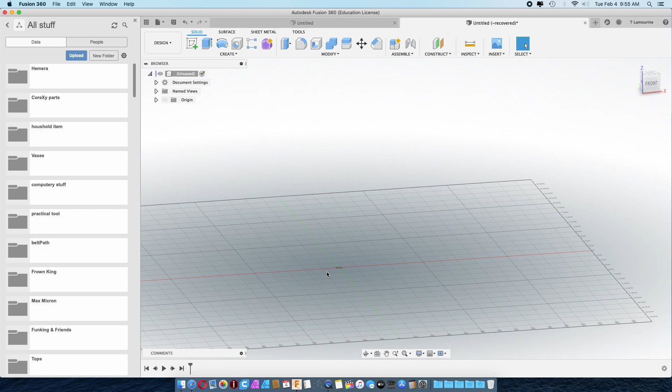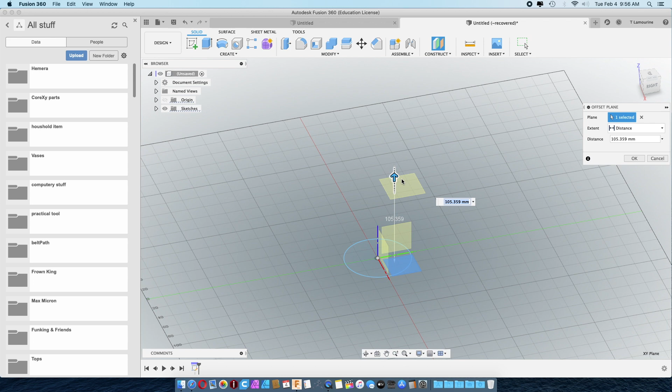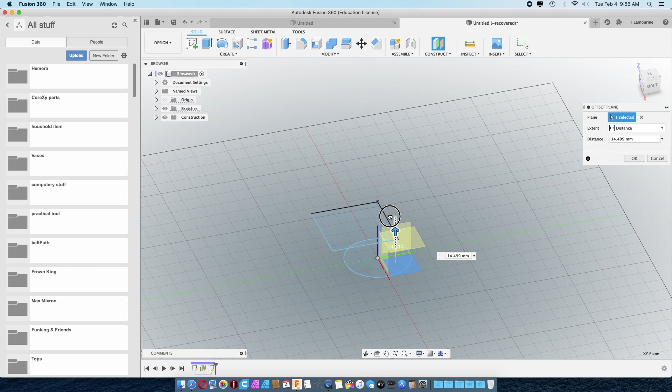So the first thing you need to do is give yourself something to loft. You basically draw some whatever shapes. Draw a circle. You have to have planes and sketches. I'm gonna bring one off here, just go up 75. Draw another whatever sketch, let's do a square. We can even do it over here, doesn't matter. And a sketch. I've discovered that you really should go from the bottom plane or the start plane that you're going to work off of, so you know the actual final height. Let's do 150 so it's even sized.

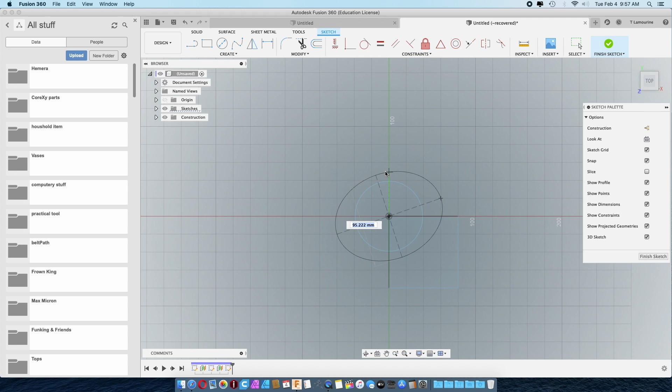And let's create a sketch. And let's create an ellipse. How's that? We'll make it all weird, even. And finish sketch. Now you can just loft it right now.

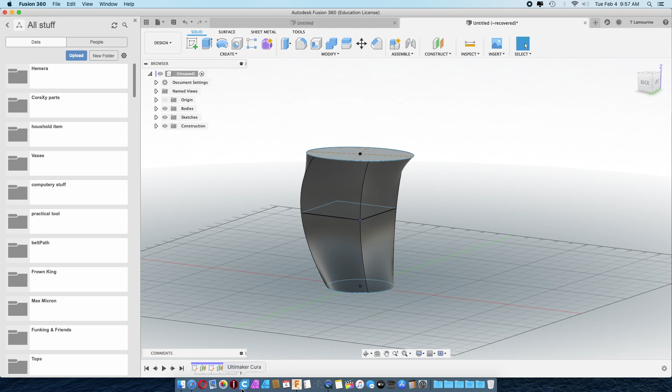Loft. And it will go from one to the other and give you a bizarre shape. And it's very cool. Now the other thing, I got this wide open, is I gotta actually edit feature. If you look at these little dots, you can move these dots around and it will actually edit your shape and the arcs.

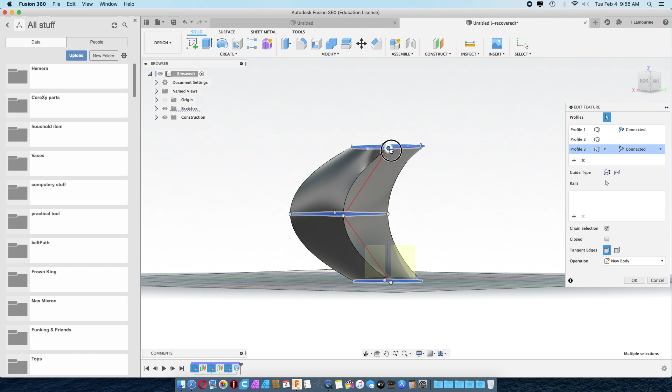These are basically exterior guidelines and it changes the shape. See how it's changing it? Well, you can do it on the square too. I don't recommend it, I'll give it a shot, but sometimes it crashes Fusion out on me. And it doesn't do as much. See how it's just changing the pitch.

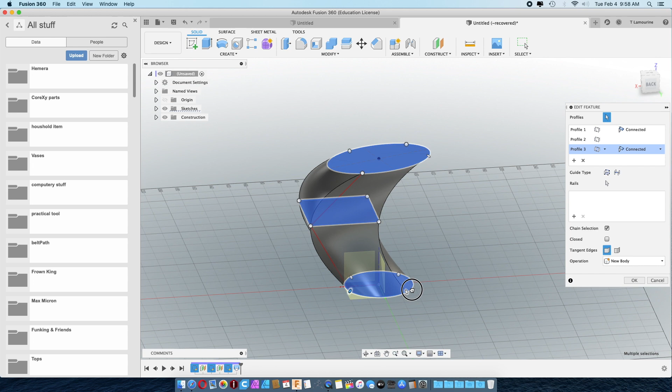But it's very useful with circles and stuff, because sometimes you can get odd shapes that don't really pan out correctly. And you can smooth out the arc or make it even more bizarre.

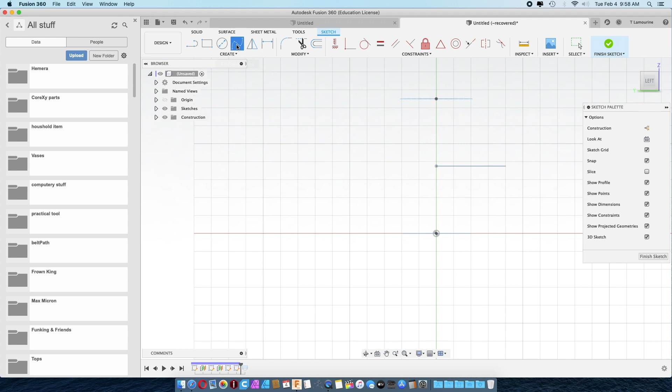Okay, so the other thing you can do is go back beforehand. Let's go back one. Start a new sketch and let's go on one of the sides. What I'm going to do now is make an arc for a guide. And that will change it even more.

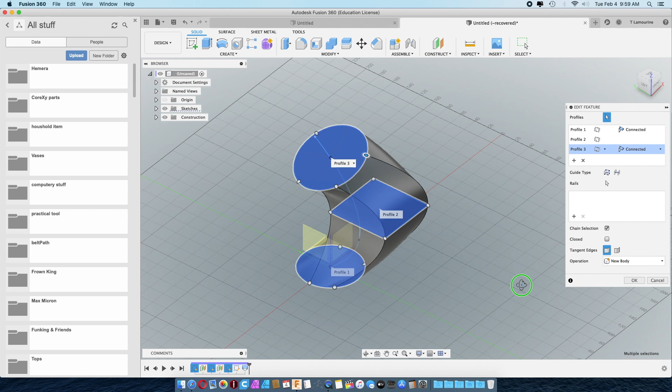So if we go back into our loft, edit feature, and right here we can say use a center line, and then select that center line, it'll slightly change it. It can be a good or a bad thing.

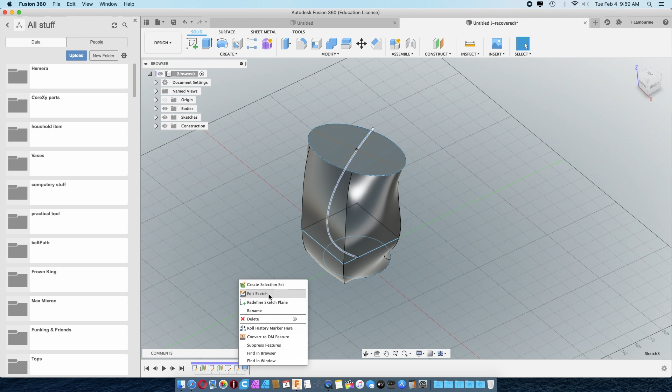You can also change it even more by taking that center line and moving it all around, because now you can actually do it in 3 dimensions. So if I hit the move tool and I grab a point, it won't stay flat on that plane. I can actually move the point in 3 dimensions, the guideline.

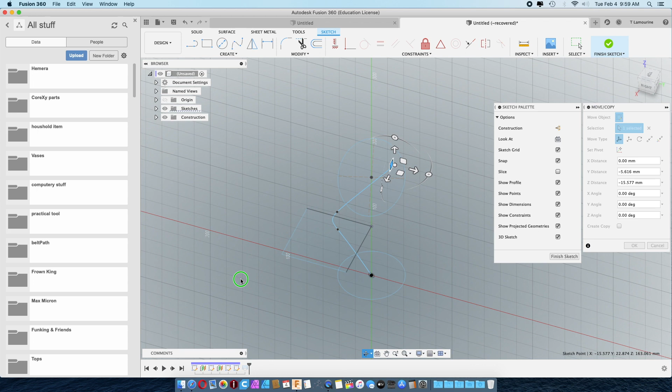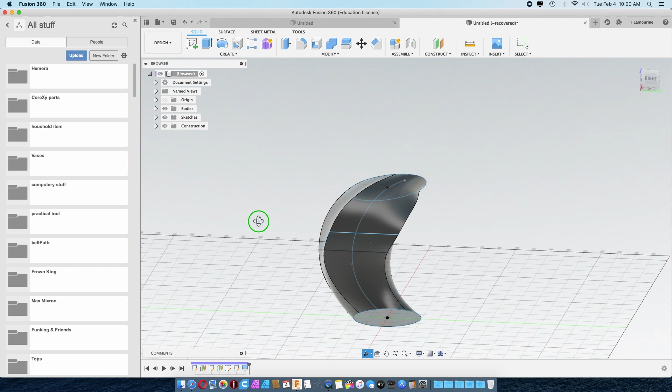So I can get an even more bizarre shape. See how it kind of twisted it all up? Working with this is really, really, I kind of think it's fun. You can do some really bizarre shapes. It's fun to just do like I'm doing right now sometimes.

Now the one issue I found with it is you can't do a hollow. What I mean by that, well you can, but you have to do an extra step. Edit sketch. Let's say I wanted to make this a tube. So I kick this in, say -10. And what I really want to loft is just this circle here, and do it all the way up.

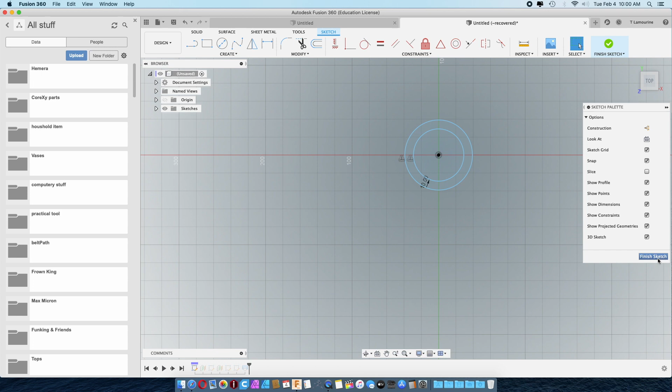Edit sketch. Select all. Offset, -10. Oops, so it's got to be +10. That's another thing, I'm not sure why, sometimes it's got to be negative or positive to go inside. It's a little odd.

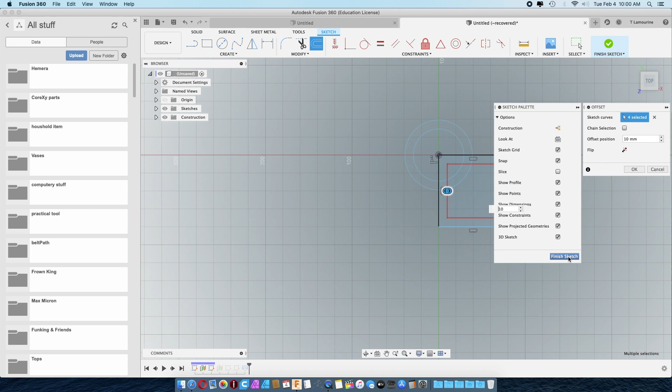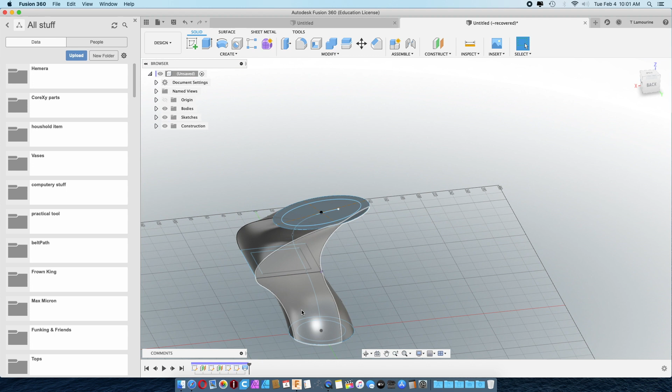And the last one, edit sketch, bring this in 10, -10. Okay, now if I were to try and change that loft to just the circles, it'll fail. See? But there is a way to do it.

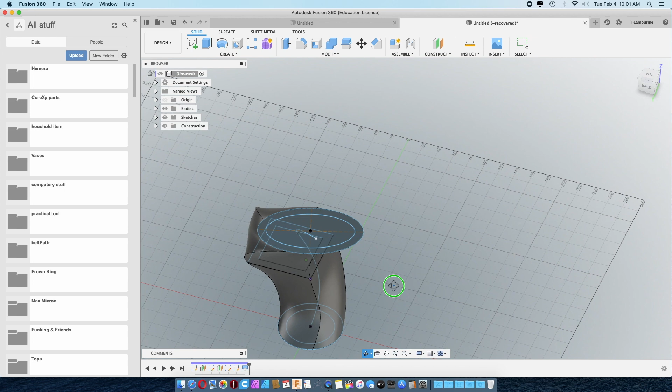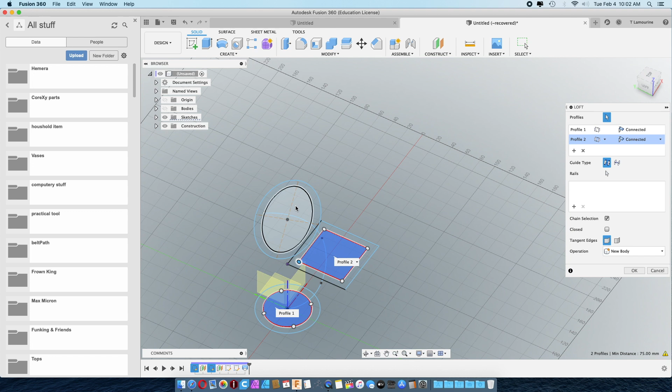Command Z, Command Z. And that is basically to double loft it. So you lofted the first one with all the outer parts, and then you go back and do a second loft. And what you do then, I've discovered it's a lot easier if you get rid of the bodies. You say I want to loft from that to that to that. And now when I bring the bodies back, it will hollow it out.

Now once again, I have to tell it to follow the center line. See right here? There's like a knockout. Actually, I'll leave it. Okay. See how it's knocked out? Because I didn't follow the center line.

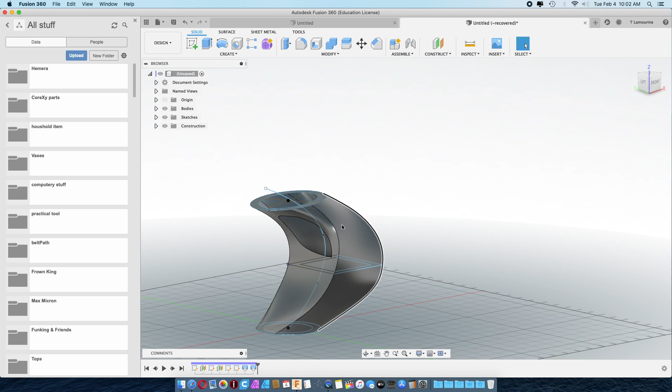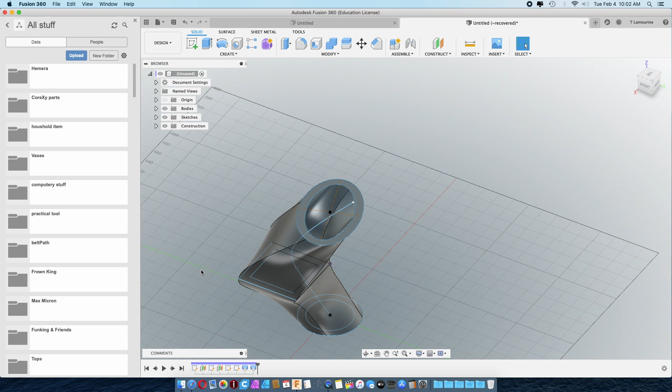So let's edit that, tell it to follow the center line. And poof, you have this perfect, like, weird tube thing. Pretty cool, I love lofting. It's just awesome, and you can do some really bizarre shapes with it in Fusion.

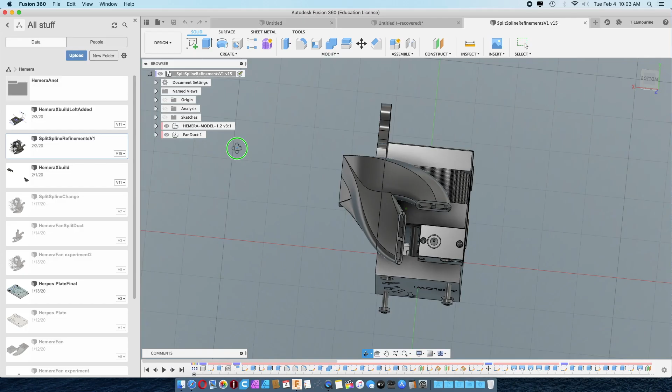And just to show you, this is how I did my air ducts. As you can see, they're a lofted duct. Duct. The Hemera. And the cool thing is if you look in here, I actually did 3 lofts, because I did the outer shell like I showed you. I did the hollow.

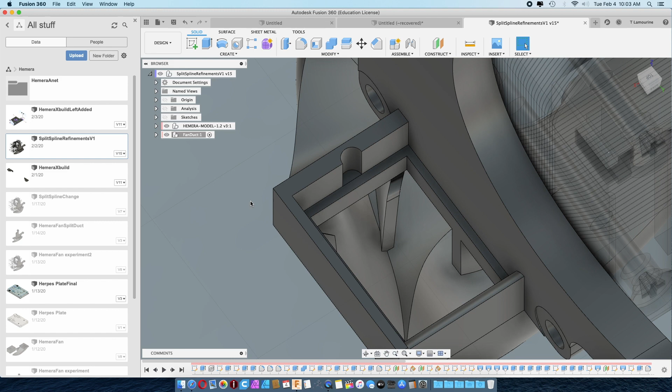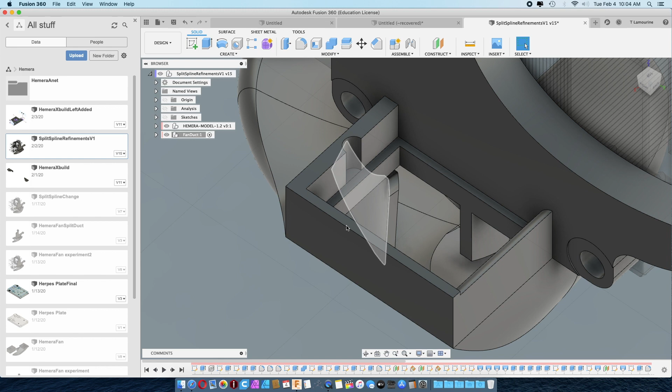And then I actually did this center line, which is an air guide. Now the other thing is, see how I got this nice shape here so it conducts the air in 2 directions? I did that by doing the hollow out loft, the second loft, to make it a tube, after both outer shells were lofted. So then it knocked them all out. Then I did the center line here for an air guide, or for a fin, or center line, whatever you want to call it. That gives you this nice center tubing with 2 outlets instead of 1.

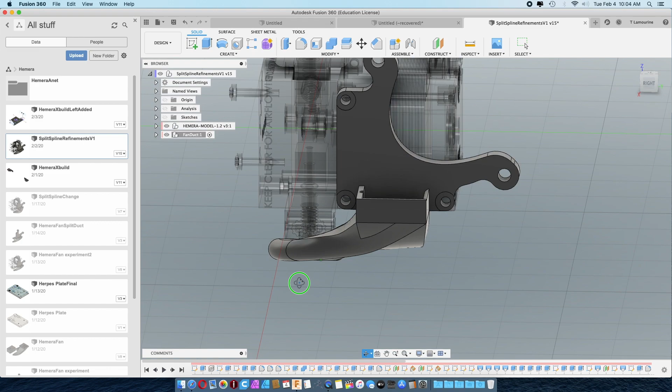And supposedly it makes airflow better or whatever. I'm not a hydro or aerodynamic person, but supposedly it makes it better. But that's how I did the lofting in my Hemera part cooling fan ducts. Ducts, keep calling them duck, quack quack. They're duct with a T.

Anyway, so that's it. Quick tip and quick overview on using lofting. It's actually very much a lot of fun.